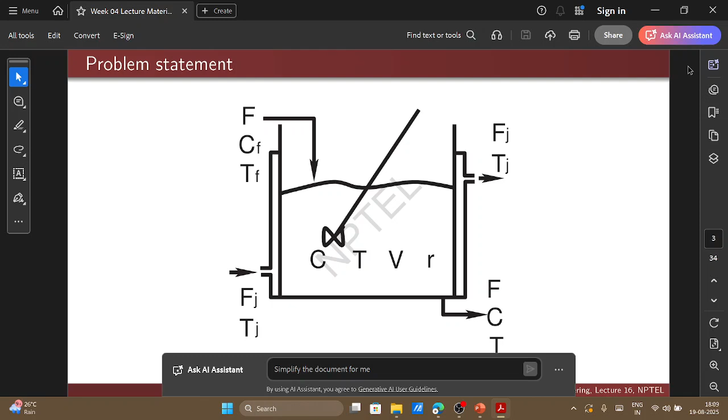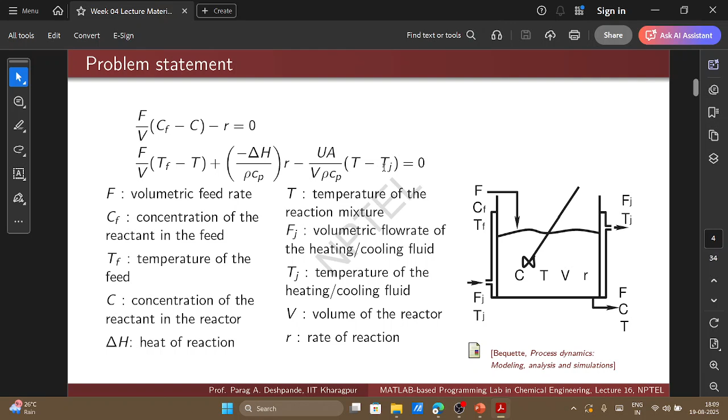So what sir has taught in the class was that if you have a CSTR which is jacketed, with a cooling jacket, and there is a reaction occurring in the CSTR, you have a mass balance equation and a heat balance equation, and these two equations you have to solve simultaneously to find the concentration and temperature profile in the CSTR, right?

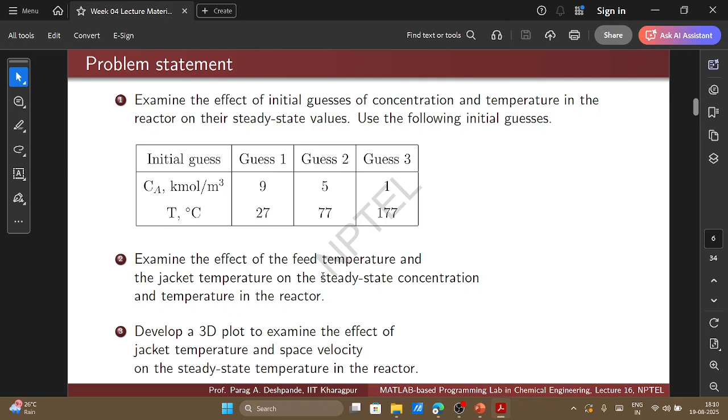So you have been given various parameters about the CSTR, different cases, and based on those cases you had to find the effect of initial concentration and temperature on the steady state values of the reactor. Steady state value meaning you have to find Ca and temperature values, right? Then you had to examine the effect of feed temperature and jacket temperature on the concentration and temperature of the reactor, which was an extension of problem statement 1.

Sir has already given not the exact code, but the pseudo codes and some of the MATLAB codes. So I hope you all are able to implement this code in your own MATLAB and get the solutions. If you have any specific doubt related to this problem, do let me know. I'm not going to solve this particular problem step by step because sir has spent enough time on this part, and it's fairly straightforward.

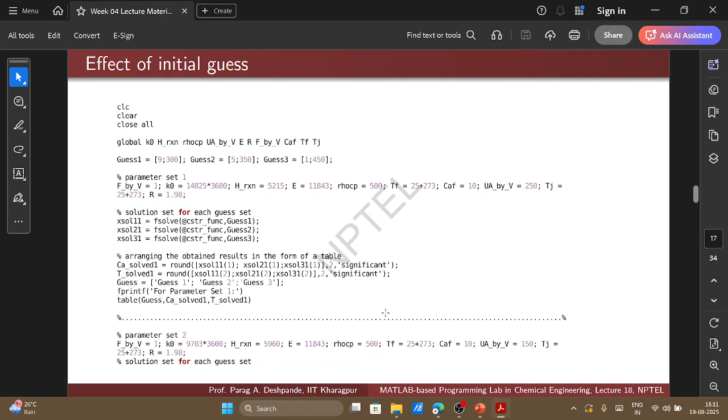This was again a fairly straightforward question. Now here the solution to this heat and mass balance required use of an inbuilt solver to find the temperature and concentration values, right? So we used fsolve here to find that solution, and based on that the various profiles were generated.

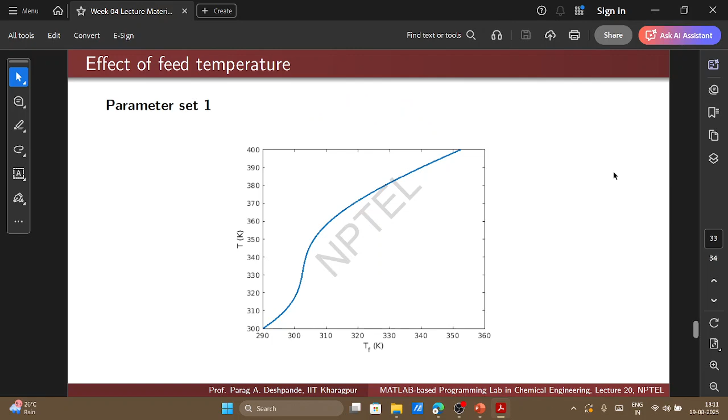So this was what sir has taught. So what I will do, instead of CSTR, I have prepared a problem for plug flow reactor, which is kind of following the similar aspect of the CSTR problem, where we have been given information about the plug flow reactor, various reactor conditions, and then you have to find the concentration and temperature profile inside the plug flow reactor, right?

So the only change will be the type of equation that we use to represent our plug flow reactor compared to CSTR, and how we will solve these plug flow reactors, right? Now in the fourth week's content, which was studying the CSTR reaction, the main inbuilt function that we relied on from MATLAB was fsolve, where you had to solve the mass balance and energy balance equations to find the values which satisfied your fundamental equation of CSTR, right?

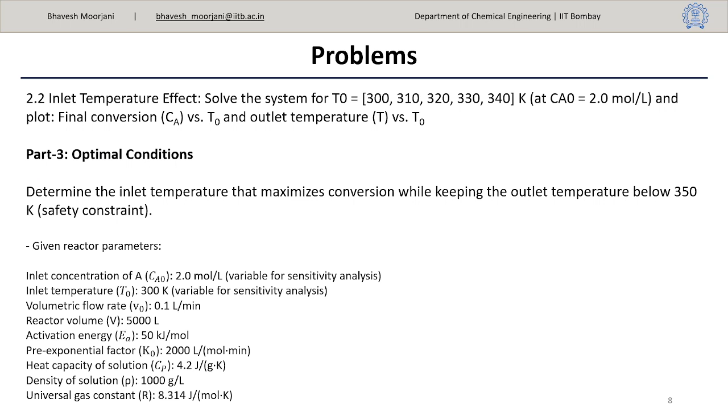Then on the energy balance part, if I consider the delta V volume of my plug flow reactor and try to do the energy balance for that particular part, what you will get is change in the temperature for that particular volume is equivalent to minus heat of reaction into rate of reaction divided by rho Cp V0. Again, it's an energy balance, so just do pen and paper calculation, you will come to this. If you have any doubt, reach out to me, I will do the detailed calculations, right? Okay.

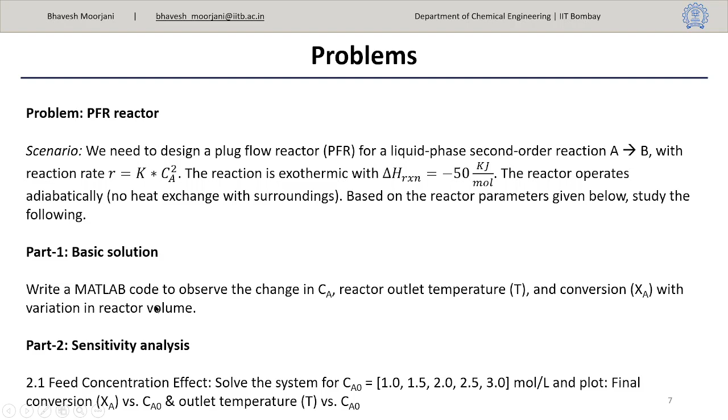From energy balance, I have dT by dV, which denotes change in the temperature with respect to volume, right? And what we have been asked in part 1 is that we have to write a Matlab code which observes the change in concentration, the reactor outlet temperature, and conversion also with respect to reactor volume. So these two equations are sufficient.

If I integrate this from, let's say, 0 to a given volume of reactor V, then I will be able to find what is the concentration. Similarly, if I integrate this equation, then I will be able to find what will be the temperature at the reactor outlet, right? So both equations are sufficient to solve our problem, but now we have to identify what method to use. Here we have been given a hint that we should use the ODE45 function in Matlab to find this solution, but we will come to that part also.

Let's say we don't know. Like you, I also start with the very basic, that I don't know which command to use to solve these problems, right? So we will take help from Matlab itself. We will search what are the functions in Matlab to solve these ordinary differential equations, and then, based on the available options, we will select the appropriate option which best fits our case. Okay.

So here, I will go to the Matlab documentation and search. Since I know my system has coupled ordinary differential equations, I will search coupled ODE. Okay. I am starting very fresh, like you. I am also thinking that I don't know what kind of solver to use, right? So this is how we will approach. It's showing me various options.

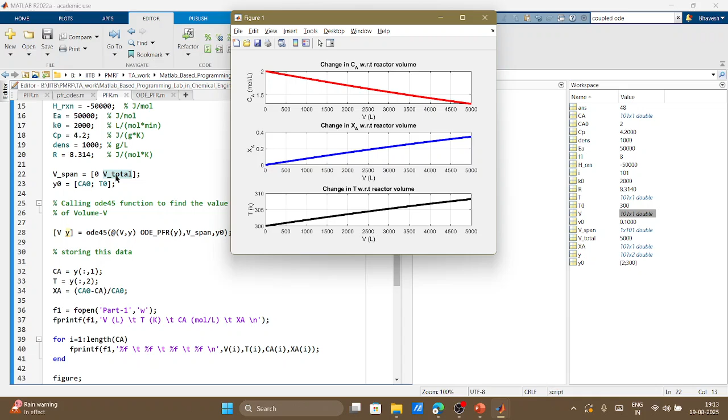You can see my XA has increased. So from 41 it went to 101 data points, right? And you get this many in-between data points. This dot representation doesn't look good, so let's get rid of this. And probably these are too many data points, so I will stick to the default value for now, since I don't have any specific need. Okay, so this is how my plot looks. So this was part 1.

We did the basic analysis of how, with the change in the volume, the concentration or the conversion changes. So you can see when we reach the end of our reactor, my conversion of A is somewhere around 0.34, which is actually very low. So in that case you can change the design of your reactor, maybe try to increase the cross-sectional area to increase the volume, or go for a much larger volume. Say you want to keep the cross-sectional area constant, then you can increase the length of your reactor, which will eventually increase the volume, right? So this concludes part 1.

Now what does part 2 say? We have to do sensitivity analysis, where we first look at the feed concentration effect. You have been asked, if feed concentration is between 1 and 3, for various values of feed concentration, plot how it will affect the conversion and outlet temperature, right? So let's do part 2. I'm defining section 2, part 2, which says sensitivity analysis.

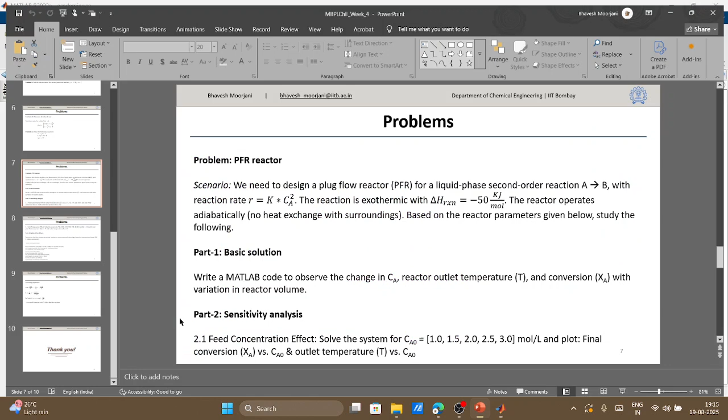Okay, 2.1 says effect of CA0 on output, right? We have been provided a CA0 range, so it starts from 1 to 3, right? So I can just create 1.5 to 3. So this is my range of CA0.

Now, in the previous part, part 1, CA0 was constant, and we were just solving the ODE for various values of V. Now here our CA0 is also changing, so we will run a loop over the CA0 range. Every time we will update the value of CA0, which will then be put into ODE45. This is the basic idea.

So we will create an i loop for i ranging from 1 to length of CA0 range, and we will update the CA0 value. Mind you, CA0 is a global variable, right? So I am updating it, and it will become CA0_range(i). So CA0 will take the CA0 range value. Now I can call the ODE like I did in the previous part.

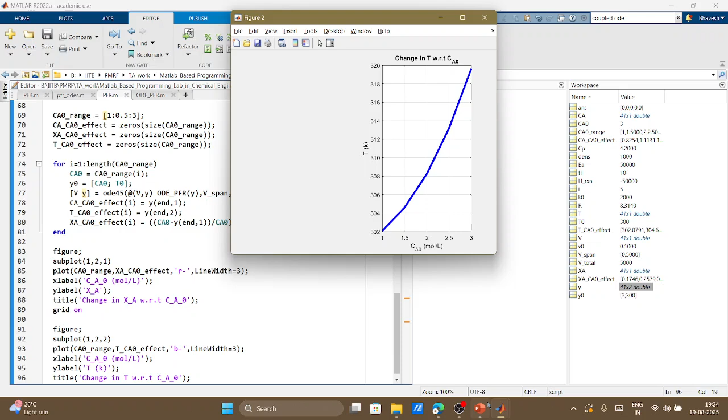Now I am only interested in part 2. Part 1 I have already seen, so I will run section only and see how my plot looks. 1, 2, 1. It has not updated. Oh, my mistake, I have to remove this. These are the same plot.

So you can see this is how it changes. So if I increase the inlet concentration of my reactant A, the conversion is increasing for the same volume of a reactor, right? At the same time, as its conversion is increasing, because of the exothermicity of the reaction, outlet temperature will also increase. That's why you can see the shoot up in the temperature value here.

Now let me put in between data points here. So let's highlight them by star. Let's keep line width 2, run this section. Yeah, this is how it looks like. Okay, so right now we have been provided with only 5 in between points. So this is how it looks. You can do fine tuning. In that case your curve might become much smoother also, right?

So let's say instead of 3 I can go till 5 concentration also, and this is how my profile looks like. Okay, so at one point it will become saturated, you can see. So let's say instead of 5 let's do 10 and see what happens. So after my initial concentration is somewhere around 7 mole per liter, you can see there is very little effect on the conversion, because you are getting almost complete conversion for a given reactor parameter.

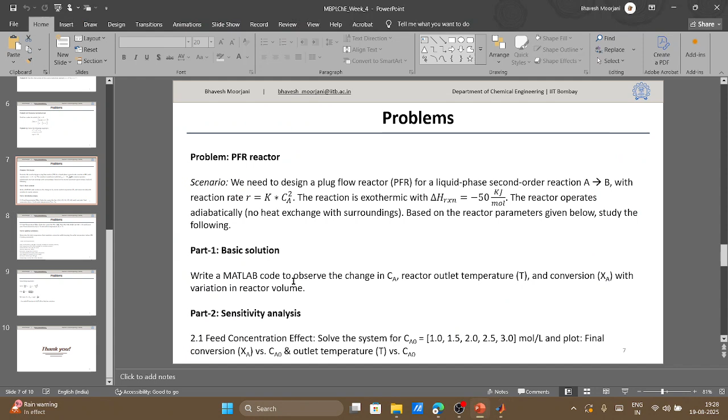Here I was mentioning this part that I have written C_A_0. So this will put all the text into the subscript, right? Okay, so just a small anecdote. Now here I'm visualizing this effect individually, the change in the concentration. Now the second thing asked in part 2 is to also study the effect of inlet temperature and how it will affect the conversion and the outlet temperature.

Do we have anyone? No.

Okay. So again, similar to the previous part, we will create a matrix for various temperature values. I am simply copy pasting it. So this is 2.2, this becomes effect of T0, which is inlet temperature, on output. I will have a T0 range. What range have we been given? 300 to 340 Kelvin. So 300, increment of 10, and 340 Kelvin, right? I will call it T0 effect. This is T0 range.

So previously our global variable, which was input concentration of the reactant, changed. Now variable T0 is changing, so I am creating a matrix which will note the changes in the concentration and temperature with respect to T0, right? So we will run a loop over the length of T0 range. Previously we updated CA0 since CA0 was changing. Now we will update the T0 value. T0 is a global variable, right? So we will update the value of T0 as T0 range of I. Update the value of Y0 for the corresponding T0.

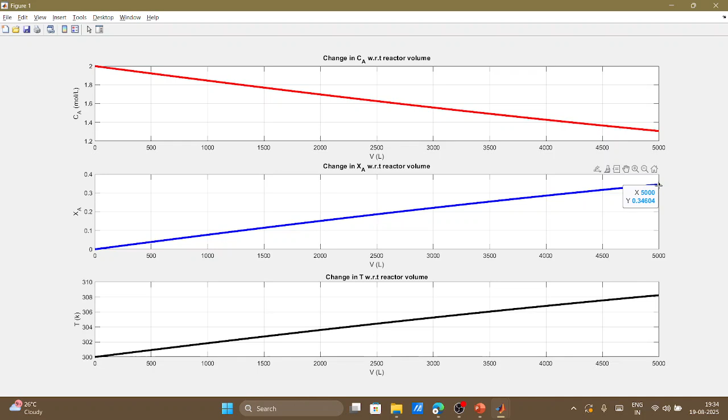For a given reaction parameter, if you are operating at 300 Kelvin, your final conversion will be 0.34604, right? So this is what we saw in the initial plot part 1, that when we are operating at 300 Kelvin and we reach the final part, our conversion is this much, 0.34604, right? So similarly, for a given data at 300 Kelvin, we start with this conversion.

But if I increase the inlet temperature, you can see my conversion is increasing drastically. Okay, so from 300 to 310, my conversion has increased from 0.34 to 0.54, right? Similarly, obviously the outlet temperature will increase if the conversion is increasing. Now you can compare these two things side by side.

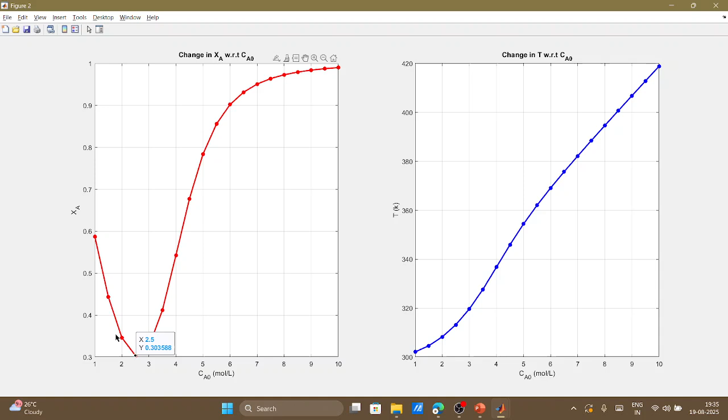So for your plot 1, what is happening when you have a lower concentration? Why is this plot looking like this? CA0 0.3, just a minute, right? Have we updated anything? Doesn't seem to have changed anything. I'm not sure about this decrease. Let me just quickly check my previous code and see.

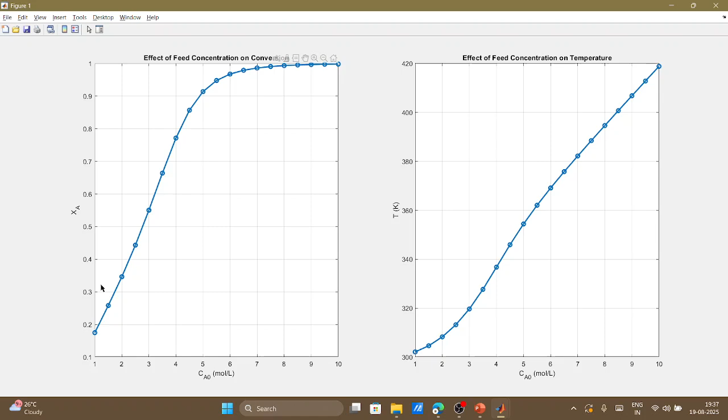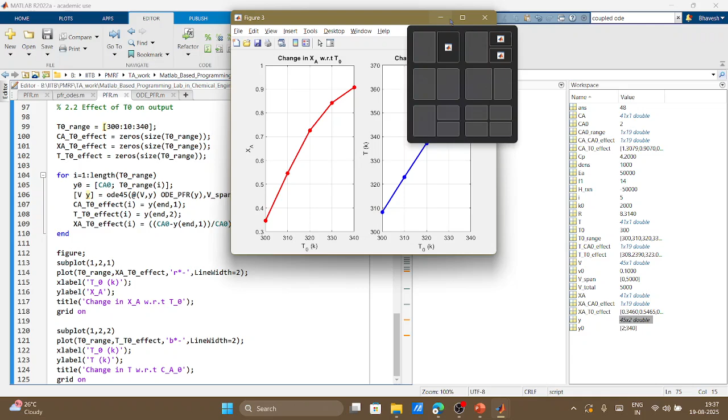Yeah, from 1 to 3 it's only increasing. One, two, three, it's only increasing, and yeah, this is how it should look. There should be no dip in between. So probably we made some mistake here. Yeah, there is some mistake here. I'm not sure what happened.

Two point one: V span, y0 is CA0 range I, and T0 is a global variable, we are not changing it. Oh yeah, my mistake is here: since we are changing CA0, the conversion was actually calculated based on the global value, that's why it was going down, but it should be the current new CA0, right? So now I think it will work fine. Okay, let's run it.

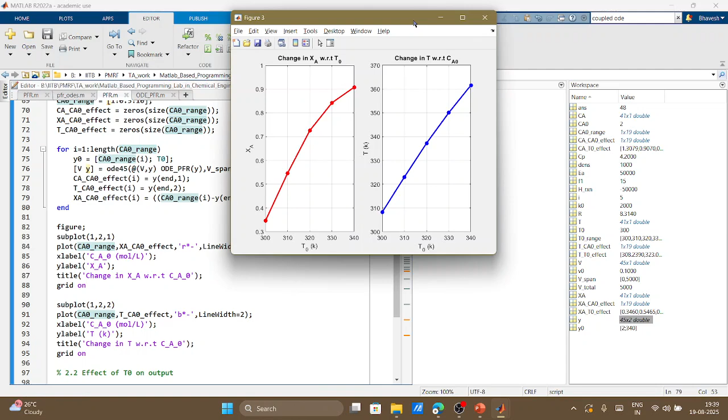So this is my first figure, this is my second figure. You can do some sensitivity analysis also: from 300, if you increase the temperature by 40 degrees, your conversion increases very drastically, while for the initial part, increasing your concentration from 1 to 5 mol per liter also leads to a higher increase, but after 5 mol per liter, increasing the initial concentration has not much effect, right?

Now these are two different plots, one with respect to temperature, one with respect to initial concentration, so sometimes it's difficult to visualize. In that case, we can create a 3D plot of the same data, where the Z value represents the outlet temperature or concentration, and X and Y represent the input concentration and input temperature of the feed, right? So for that, I have to create one 2D matrix with data for both the change in temperature and the initial concentration.

Okay, so again we can modify this. This has not been asked in the question, but let's try it, because it will help you better visualize your data. So we will put section 2.3 here, which is 3D visualization. So I have a temperature range, and we also have a CA0 range, right?

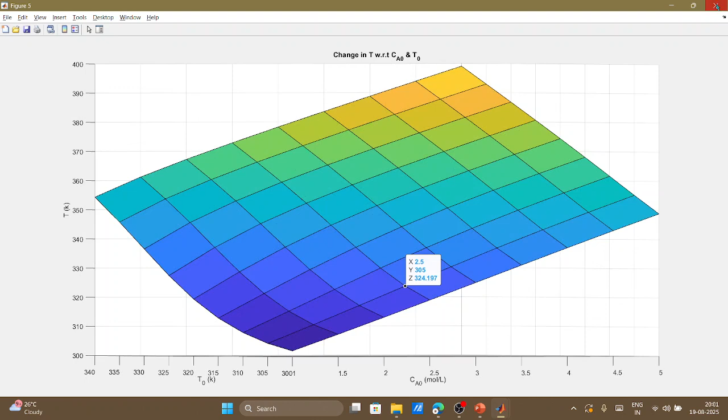So previous one was the temperature, this is CA0. So CA0 is more sensitive to your concentration. So as you can see, with change in the concentration, it's increasing more, while the temperature dependence is slightly less. Okay, so this is how you can visualize your data in 3D matrices also.

Now let's go to the final part. Anyway, we are close to closing the session. It's already 2 hours. So the final part says that we have to find the optimal condition: determine the inlet temperature which maximizes the conversion while keeping the outlet temperature below 350 Kelvin. So there are some safety constraints that outlet temperature should not exceed 350, and for that we have to find what maximum conversion we can reach till temperature reaches 350.

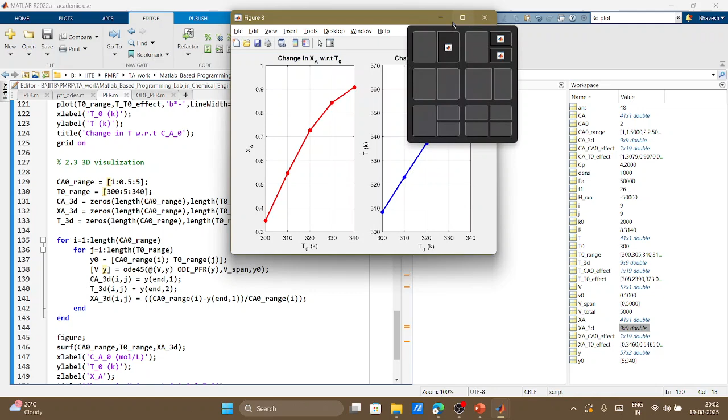Okay, so in the sensitivity analysis part, if I run it again, we were looking at this plot of change in the inlet temperature. Determine the inlet temperature which maximizes the conversion while outlet temperature does not go to 350, right? So here this is the outlet temperature, this is the inlet temperature. It touches the 350 value when my inlet temperature is 330 Kelvin, right? And corresponding to 330, I can see I have a conversion of 0.84, below which my conversion is less.

So from this plot itself I can see that my temperature should be less than around 329, right? Okay, let's say somewhere around 329 or 328, where I am just touching the safety limit of 350, and I have a maximum conversion, right?

If there was some up-down pattern, then in that case I have to determine what exactly that point is. But from here I can graphically also determine that somewhere around 328 or 329, my data point will correspond to maximum value. My conversion will be maximum while the temperature limit is 350. Okay, so

this is from the graph, but let's say you want to deduce it from the code itself, you want the exact value of temperature. So for that you can do further calculation, part 3, which is finding the optimal point. So for that, since we are out of time, I will call the data from my previous point.